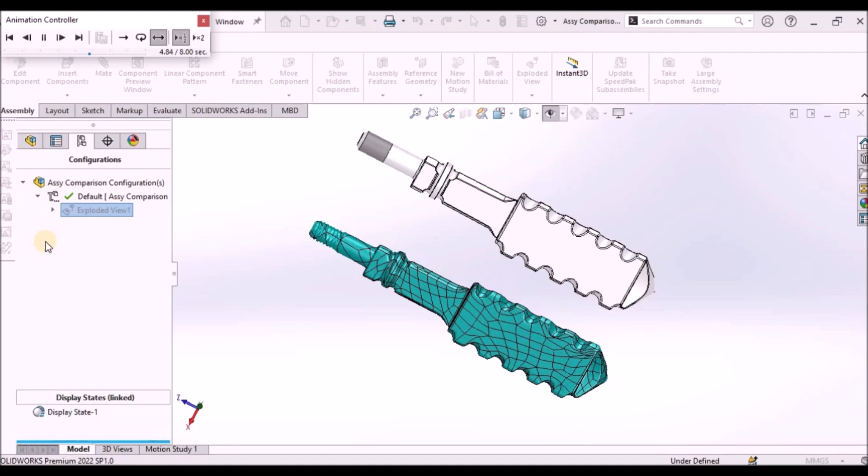Hi, today I am going to explain about gear coupling flange sleeve. This is the component I am going to create.

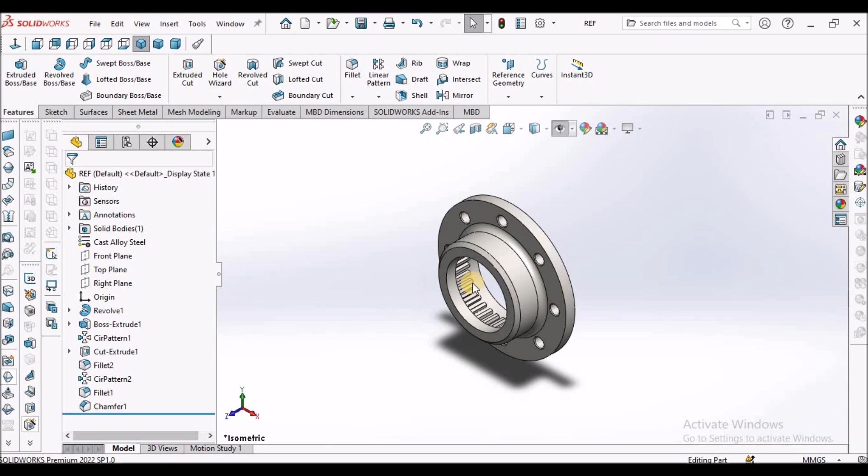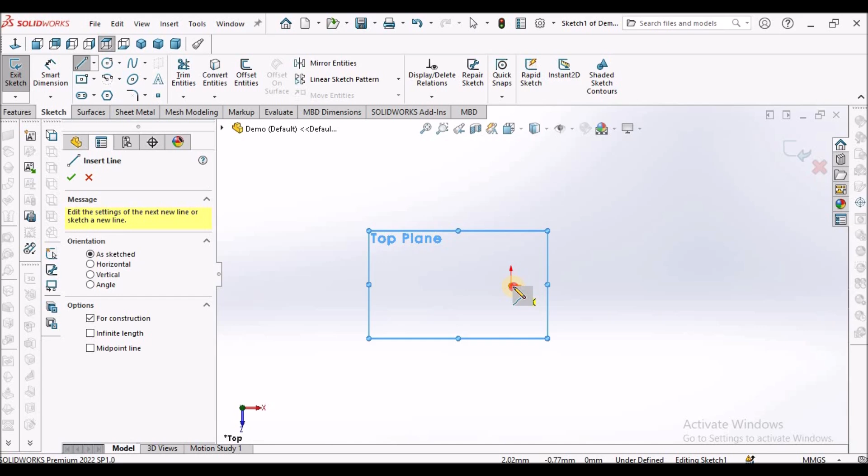So let's start now. I have taken a new SolidWorks part file, selected the top plane, gone to sketch, selected center line, drawn vertically upward, drawn one horizontal line, and the distance between the center line and this point is 55.5.

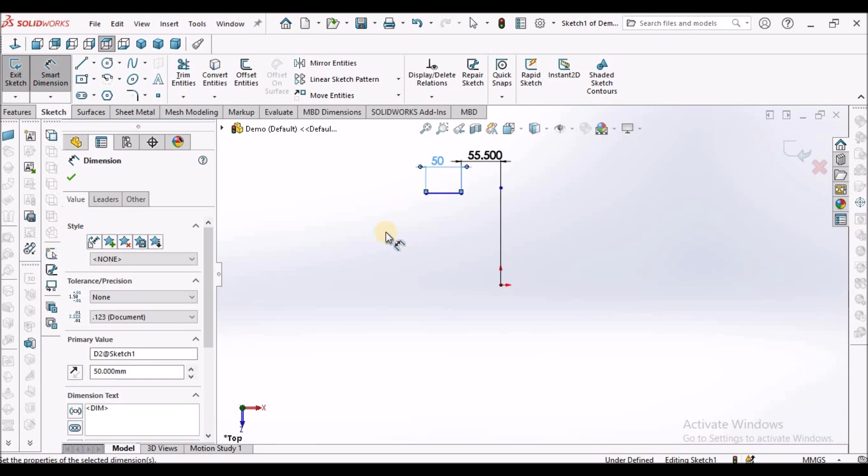And this length is 50, and the distance between origin and this line is 57. So this line is fully constrained now. Now I am going to create one closed loop.

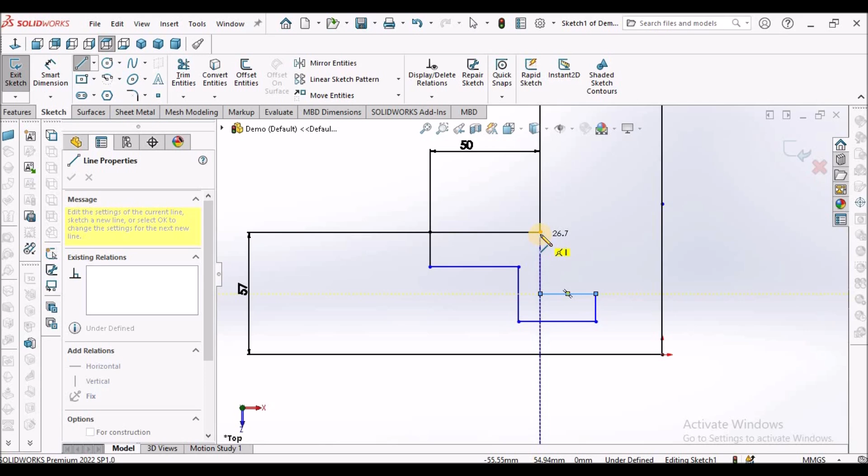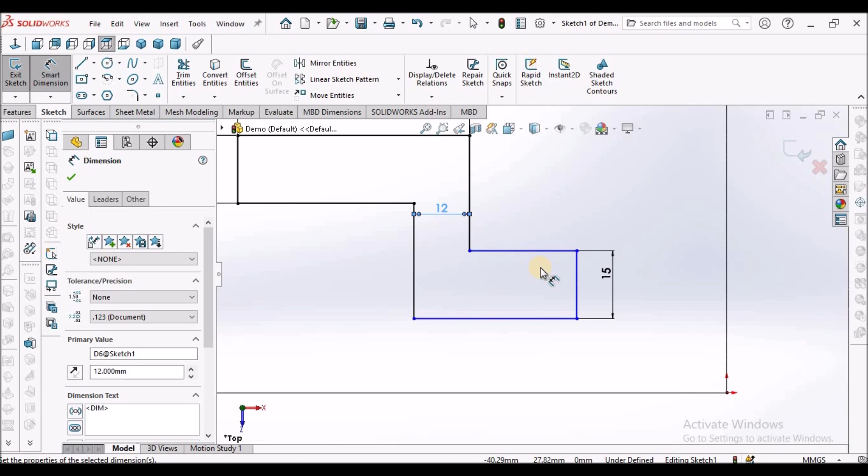So this is 15, this is also 15, and the distance between these two lines is 12. So this is 50. Select this line and this origin, make it coincide. So the sketch is fully constrained now.

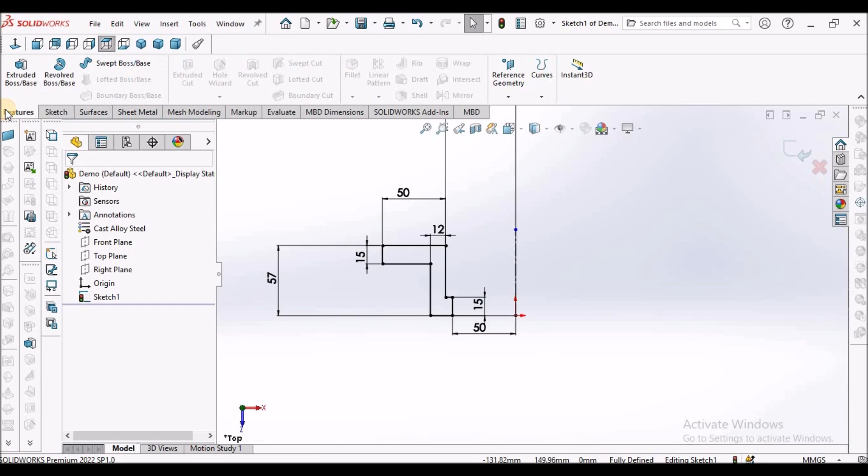Now I am going to create a revolve feature. Select the revolve feature. Automatically it has taken the center line, say OK. So this is the flange.

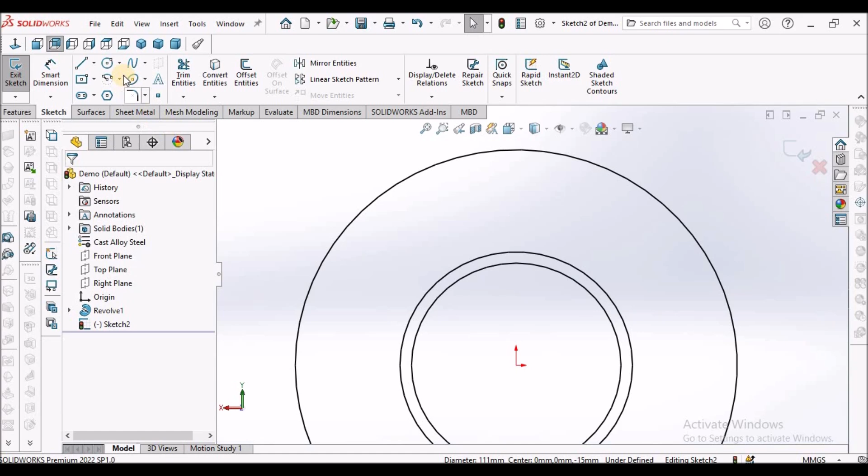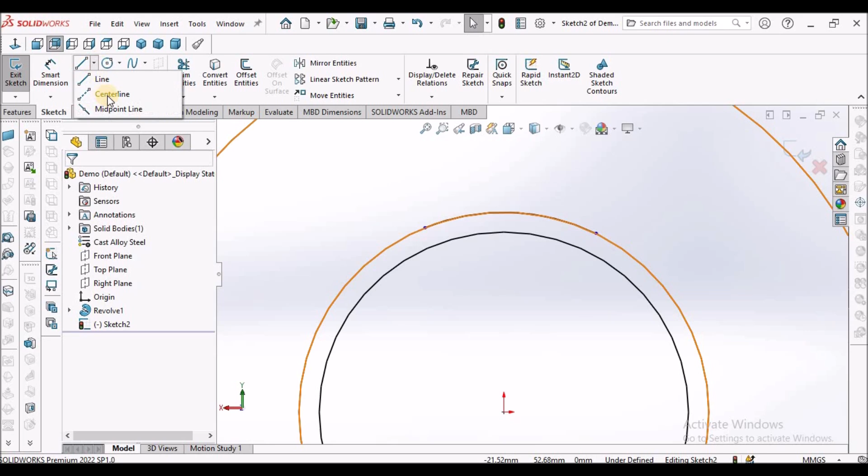Now select this face, go to sketch, make it wireframe for better visibility. Select this line, draw one center point arc, select this edge and this line, make it co-radial, draw one center line, so perfectly at the center.

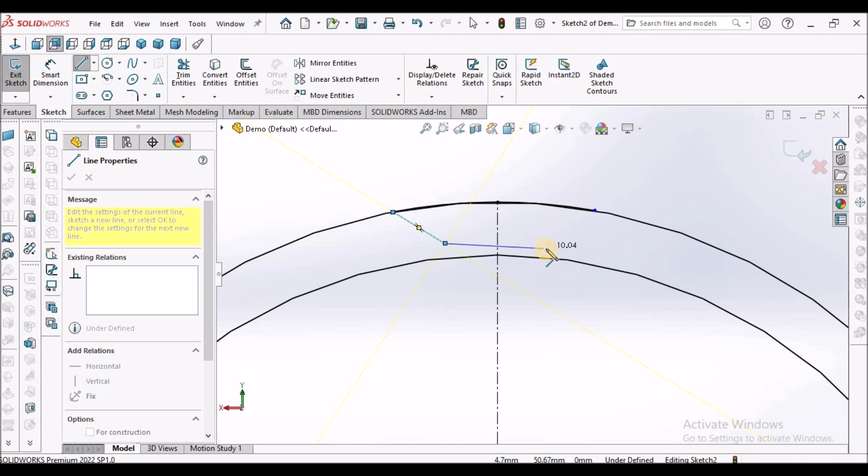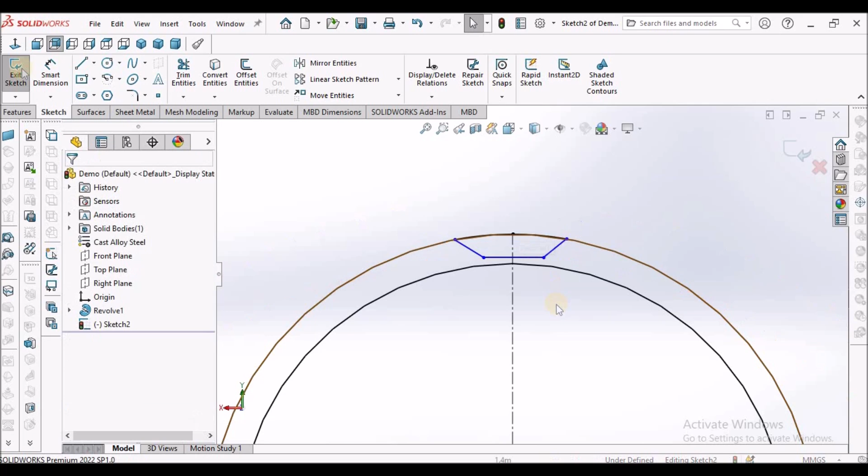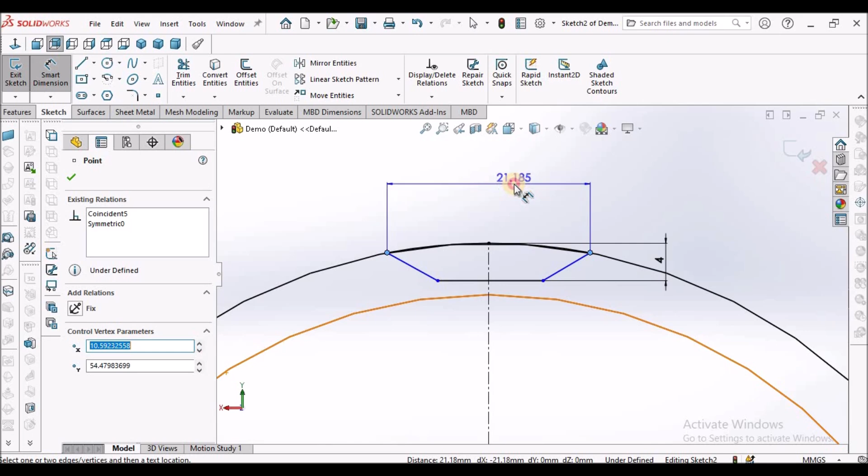So draw these lines in this manner, and select this line, make it horizontal. So this is 4 mm, and select these 2 points and this center line, make it symmetric. So this is 7 mm. This is 4.

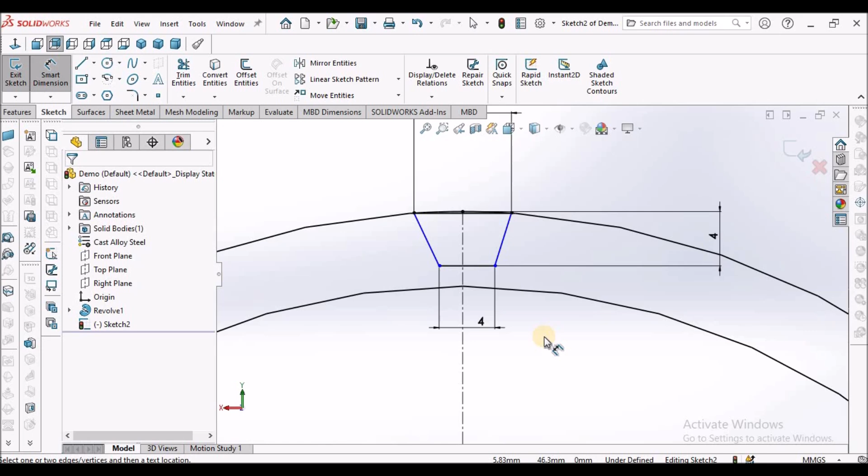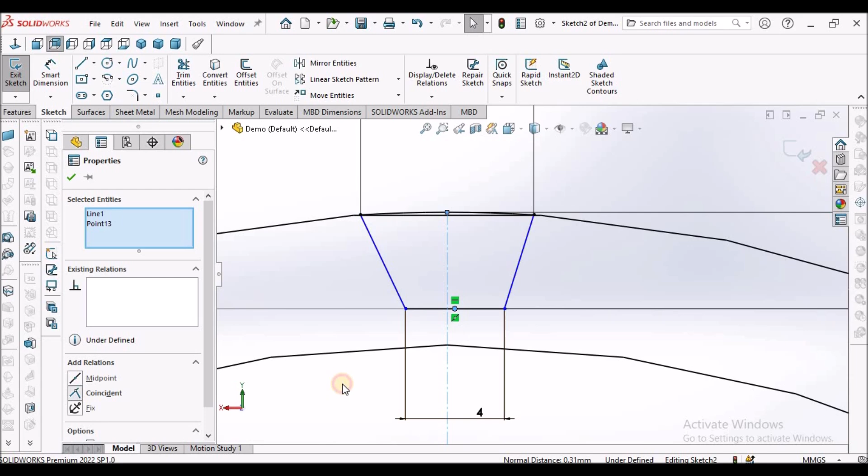Distance between origin and this is 50.5. So this is a driven dimension, so we will take it as a reference. Select this line, select the midpoint and this line, make it coincide. So it is exactly at the center. So it's a fully defined sketch.

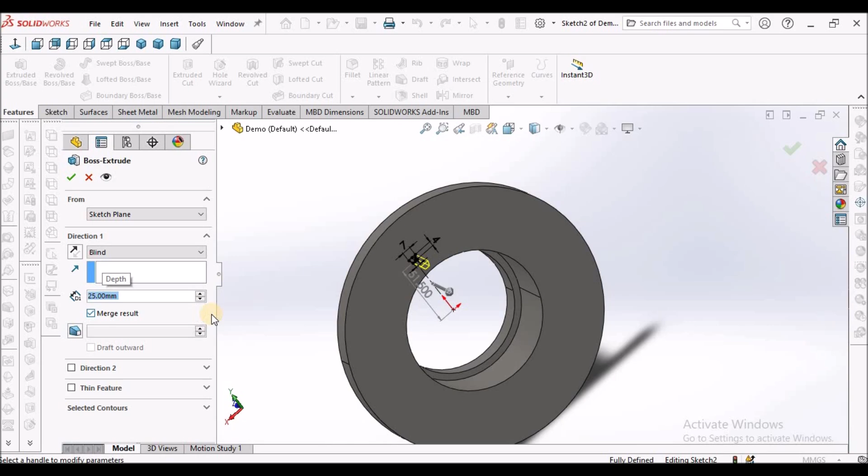Keep it in solid and select the extruded boss. So the extruded boss is 25 mm. See here, it is creating a gear teeth. See, this is the teeth. Now we have to pattern this.

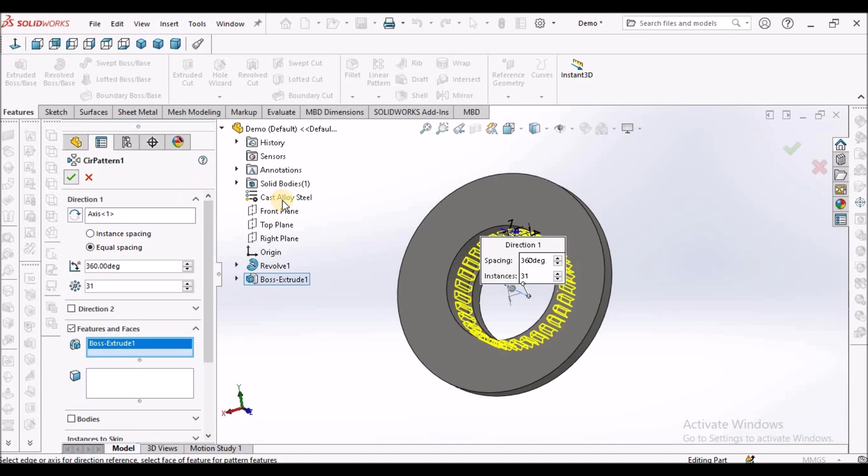Select the temporary axis. We have to select the circular pattern and select this line. So the number of teeth is 31, and we have to select the feature. Select from here and say OK. So this is the circular pattern of this feature. Now I am going to hide this.

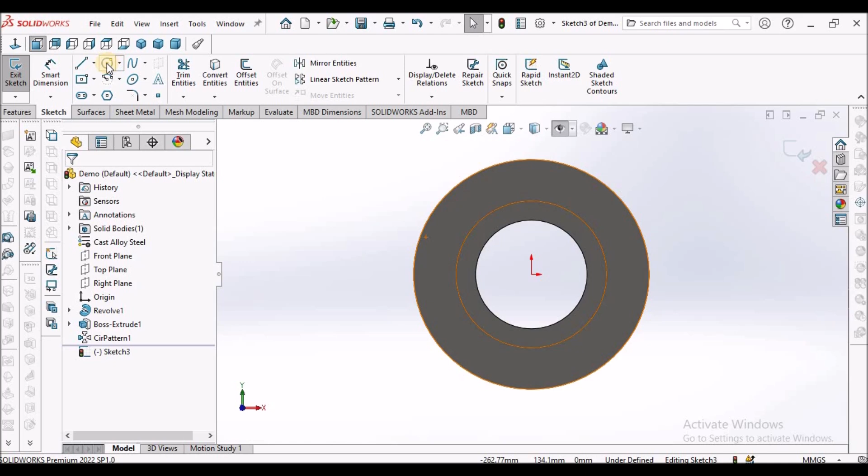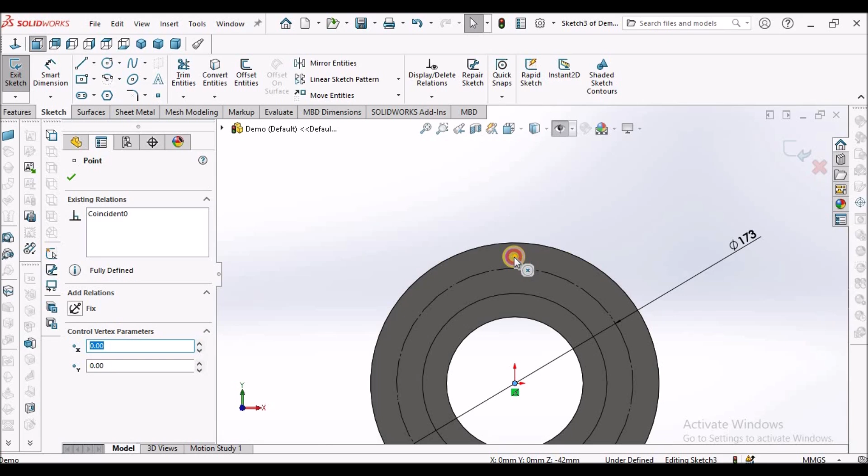Now I am going to create one hole feature on this. Select the sketch, draw one circle from the origin. This is 173. Make it construction. Draw one circle. Select this and this, make it vertical. So it is exactly at the center.

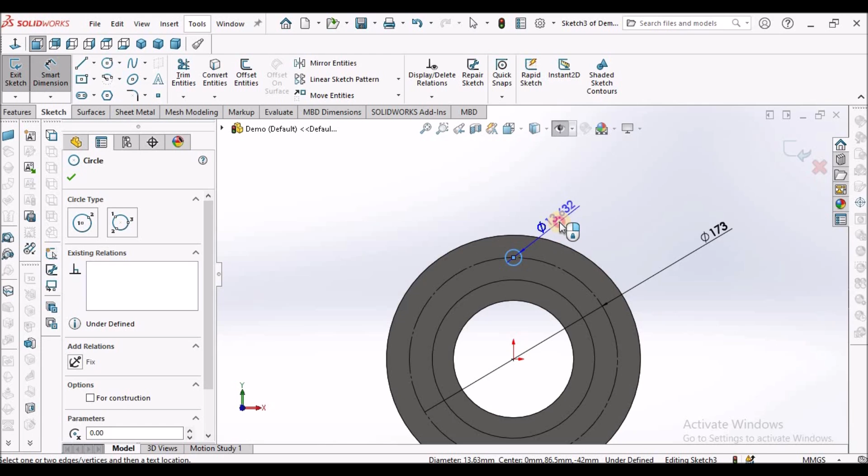Now select this center and this circle, make it coincide. So it is exactly vertically upward exact on the origin. Now select this diameter, and this diameter is 15. Go to extrude cutout, say through all, and say OK. See here.

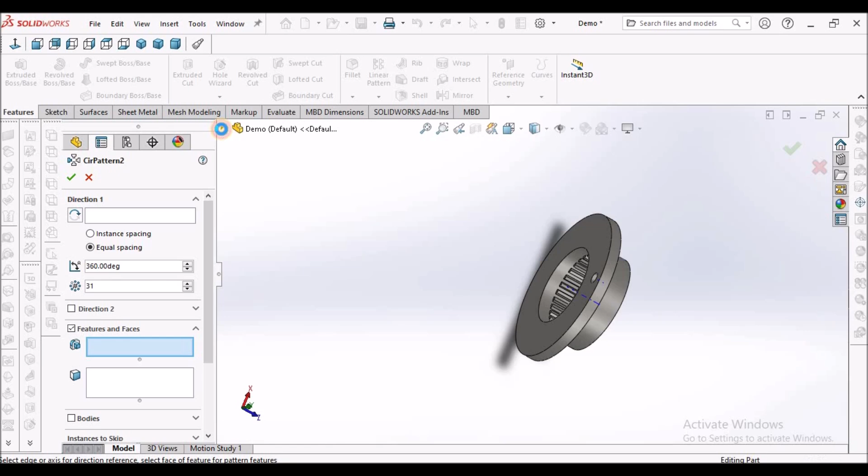Now go to circular pattern, select this axis, and feature this circular cutout. So the number of instances are 8. See here.

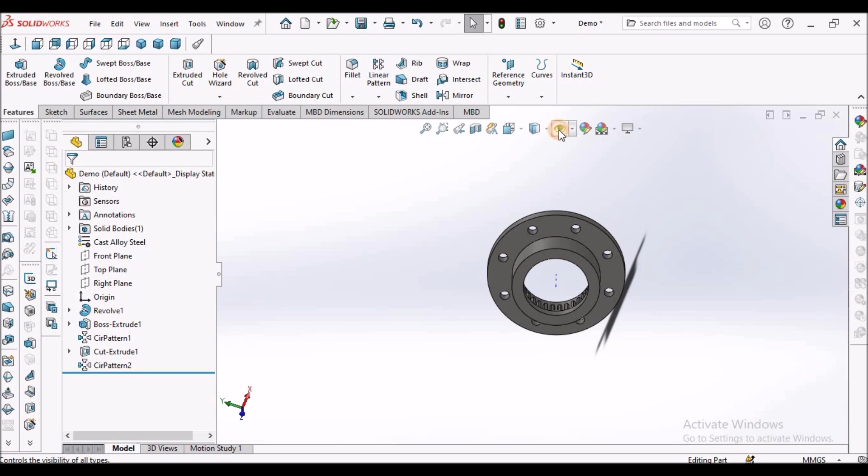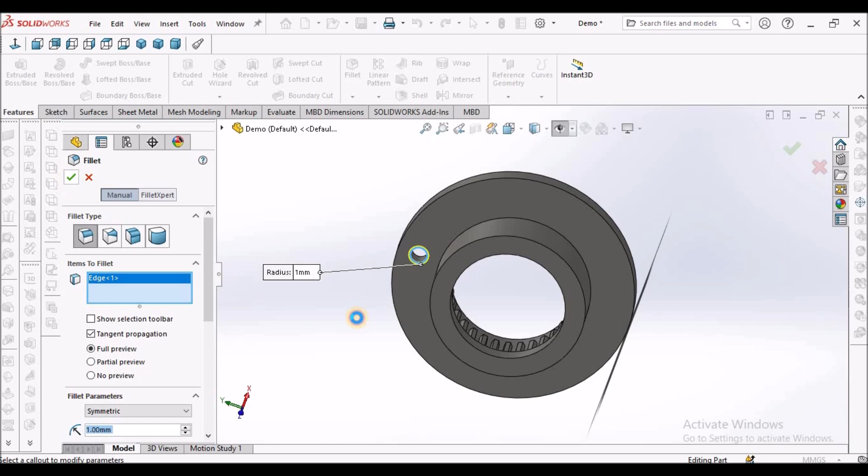Now I am going to apply the fillet, that is 1 mm. Instead of applying each instance, we can simply apply fillet at one instance. So that is 1 mm. And we can add it to the circular pattern, select the fillet. So there are two instances, one is cutout and one is fillet. See here, two features.

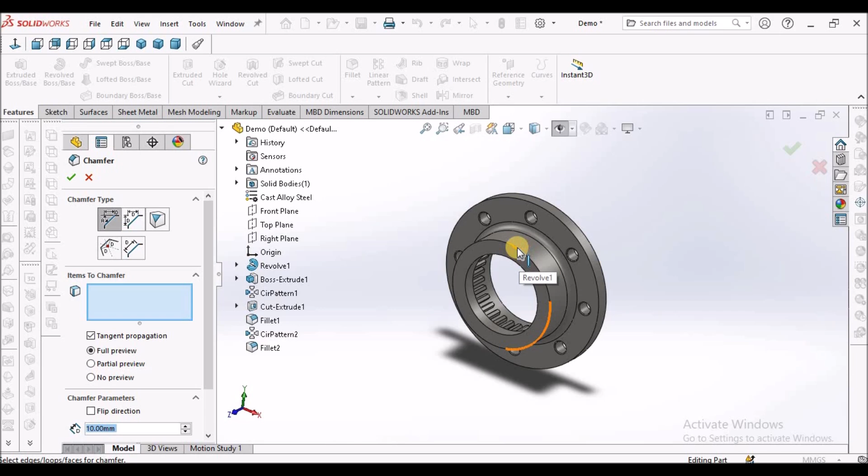Now select the fillet command. And this is 8 mm, and say OK. So there is a fillet at this location. Now I am going to apply chamfer. So the chamfer value is 5 mm into 45 degrees. See here.

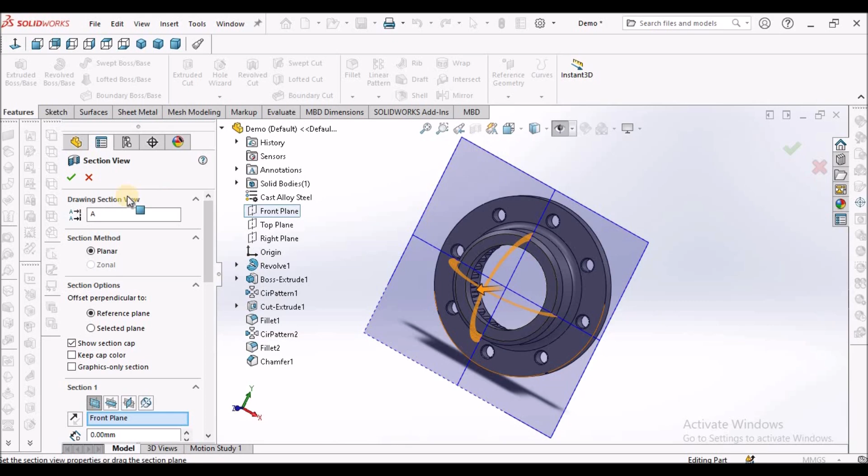So this is the final component. I'll show you in the cross section. See here. So this is the machine component. This is how we create it in part modeling.